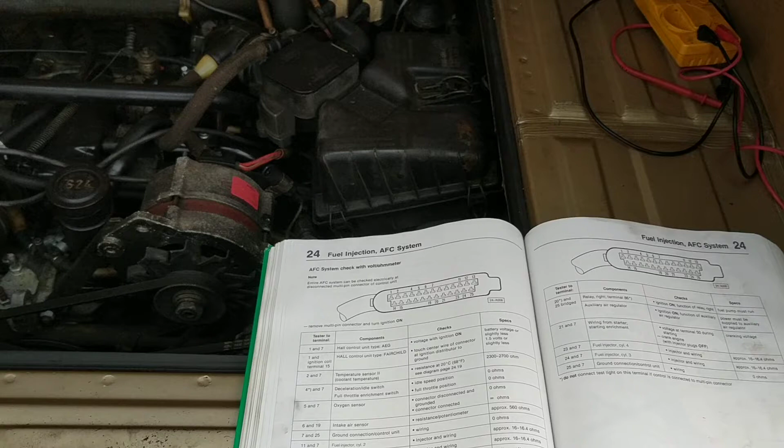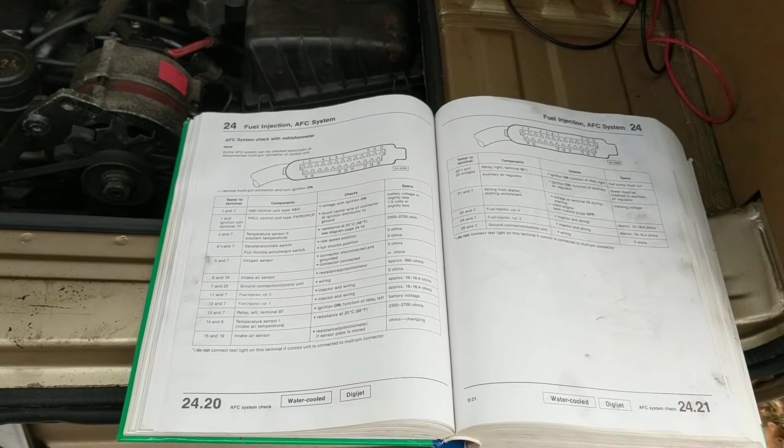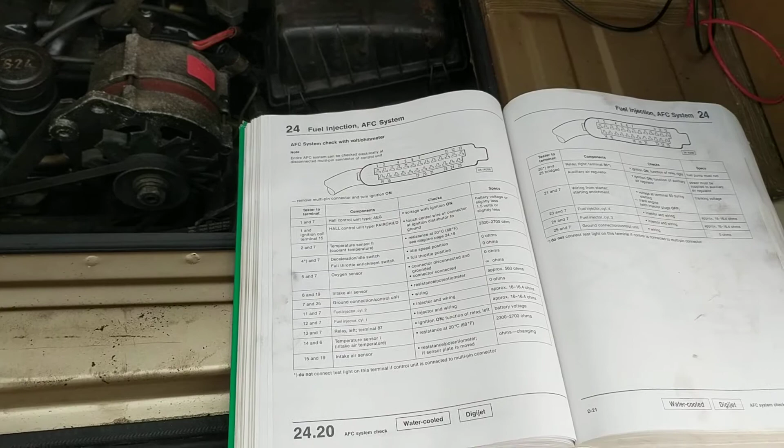People call me all the time with, Ken, my van won't start, my van won't run right, it runs good for a while, then it runs bad. And they think I have some kind of magical crystal ball that I can look into to tell them exactly what it is. Sometimes I can by the description, but a lot of times you could do a lot of the work for me if you would follow these simple steps. This is a way for you to figure out some of these problems on your own, feel good about yourself, and be able to move forward with your life.

Okay, so the first thing you need to buy when you buy your Vanagon, if this is not in the Vanagon, go on my website. There is one of these books on there. It's brand new, not beat up like this one. This one, a poltergeist threw it off the shelf for some reason. I came in the office and it was sitting on the floor, open to page 666, so that's how we know. But anyway, this is the Vanagon Bentley Repair Manual. It's worth its weight in gold, and quite literally.

All right, so once you get that, today we're going to talk about DigiJet. That's a 1.9 water boxer. You can see this beautiful display of it here. This is for the 1.9s, they use what they call the DigiJet system from '83.5 to '85. It's a pretty nice system, pretty easy to access and troubleshoot.

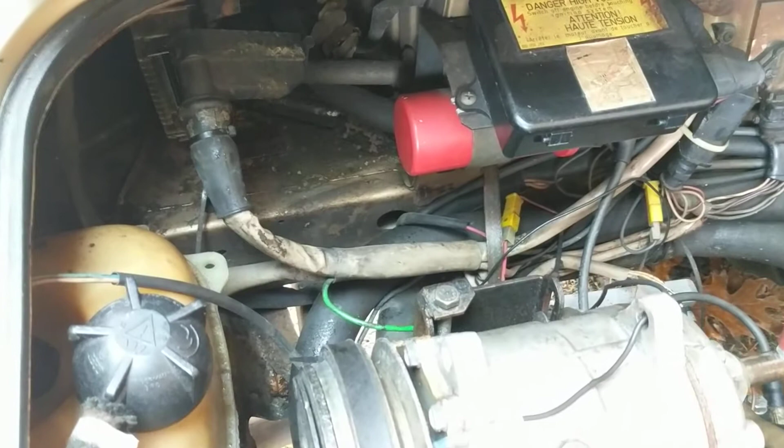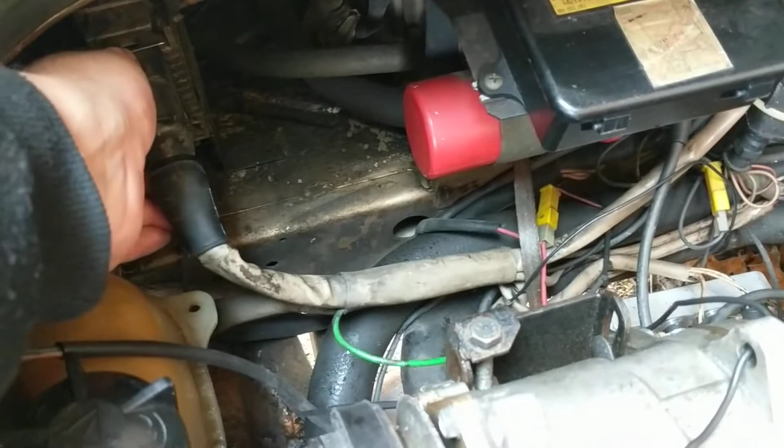The thing you're going to want to pay attention to, if this camera can ever focus, is this right here - this is your computer. It's behind the driver's side tail light, and it has this little plug that plugs into it. You just pop this little metal clip on the top, push up on it, and that'll release this plug right here. This is your plug for your ECU.

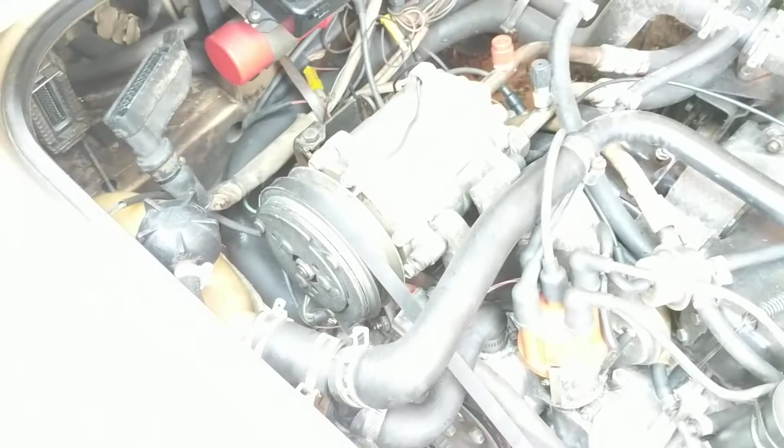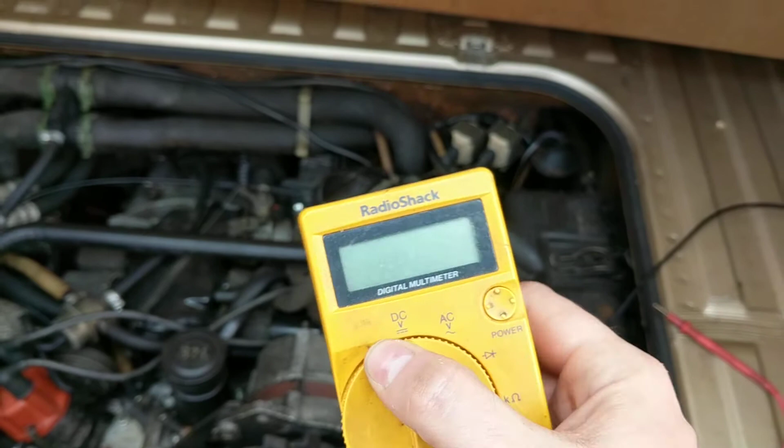It has 25 pins in there, and I know it can look scary, but then you want to use the second item that you should buy after you buy your van, which is a multimeter. This is a multimeter, or also called a multimeter if you don't have weird ways of pronouncing things.

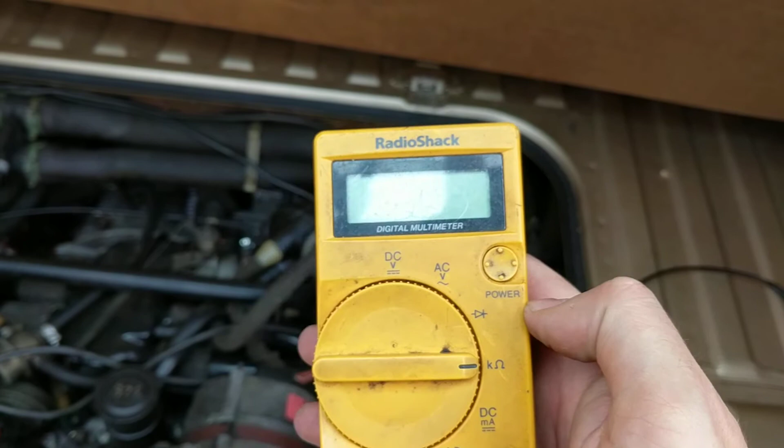Basically, you want to go to your local RadioShack - I mean, they're everywhere, I'm joking, they're over. All right, but go to a store, Harbor Freight has them. Get a multimeter that does ohms and does DC volts. That's all that you actually need.

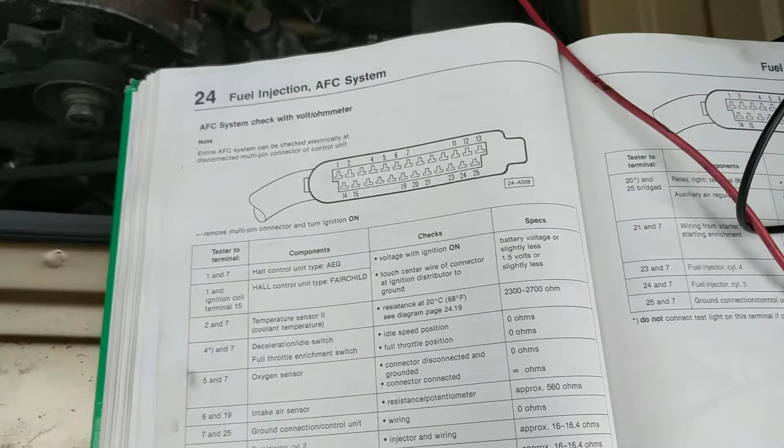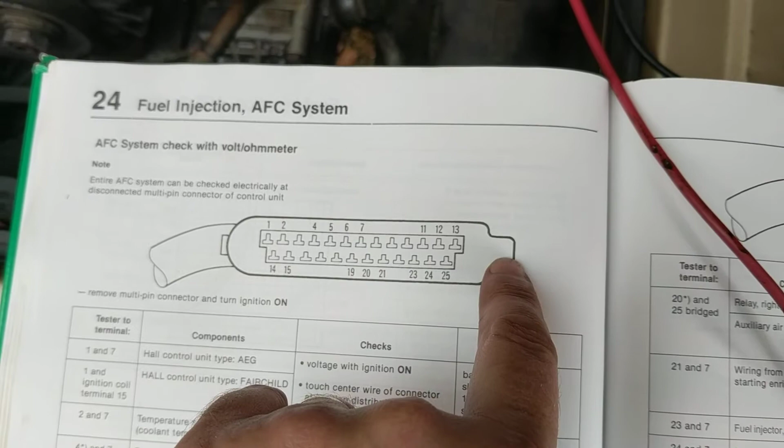Then what you do, you see this picture here, this is on page 2420. This picture at the top shows the plug. Do you see this little doodad here on this side? This is the wire harness. So if you're going to look at this plug the way the book is looking at it, you would look at it like that, because the harness thing is on the left side. If you could ever see it in focus, there we go - the harness thing's on this side, and this little tab is on this side. So that's how you would want to hold it when you're troubleshooting it.

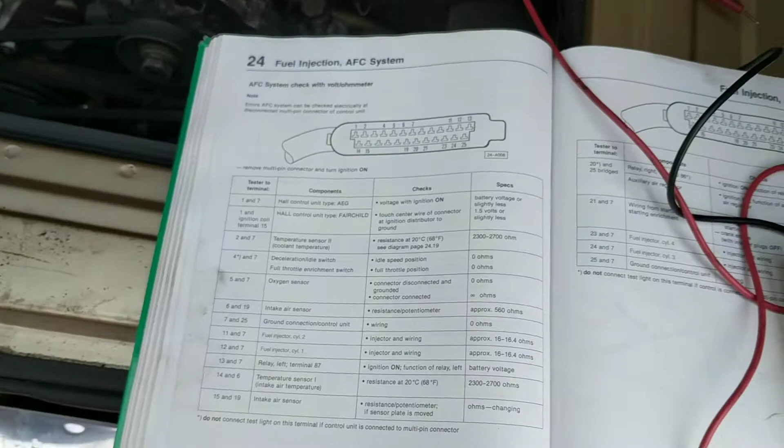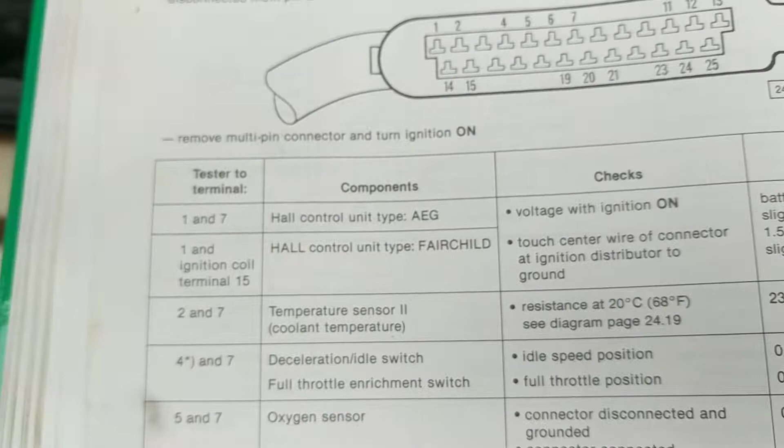Okay, that's how the pins are numbered. You won't see numbers on here, I don't think, unless you have super awesome eyesight, or a camera that stays in focus - sorry about the camera, guys. So once you know how to hold it and orient it, you will see on this picture the different numbers of the pins that actually matter. Why isn't every single one numbered? Because some of them are blanks and have nothing in them whatsoever. Then the next thing you want to do is come down here, and it will tell you a test - it has tests listed.

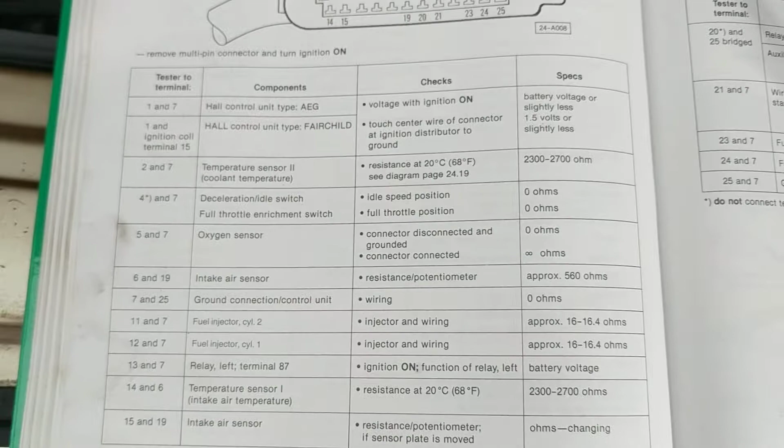If your van does not run or is having running problems and issues, I would encourage you to start at the top and go work your way down. Confirm what is going on with the car. This top one is the Hall unit.

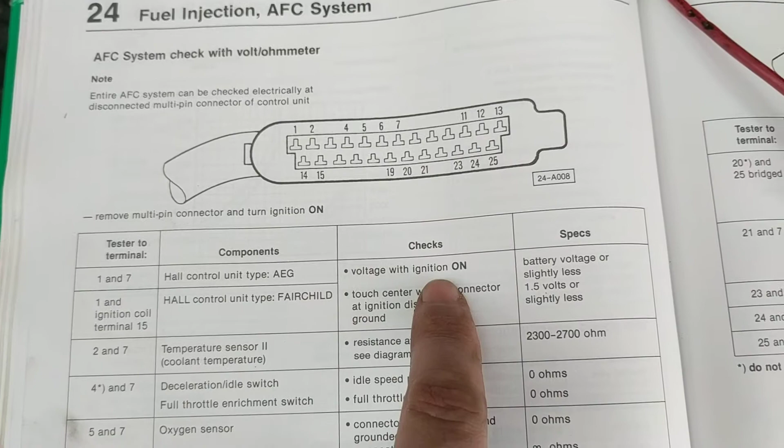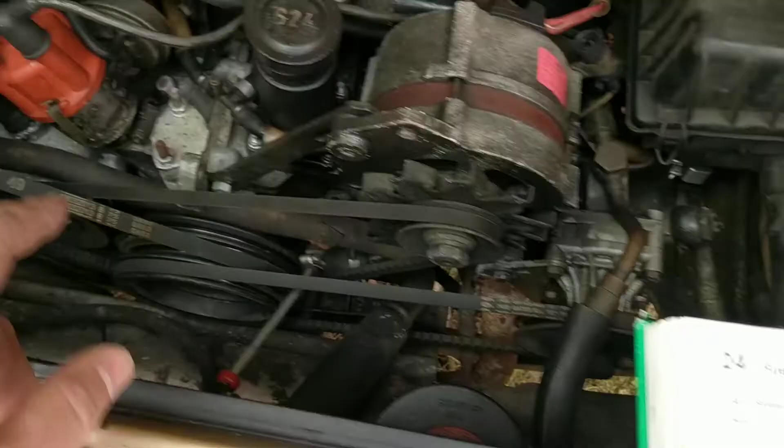Here is how you do the check. You turn the ignition on. You touch the center wire of the connector at the ignition distributor to the ground. That's what they're talking about, this thing right here.

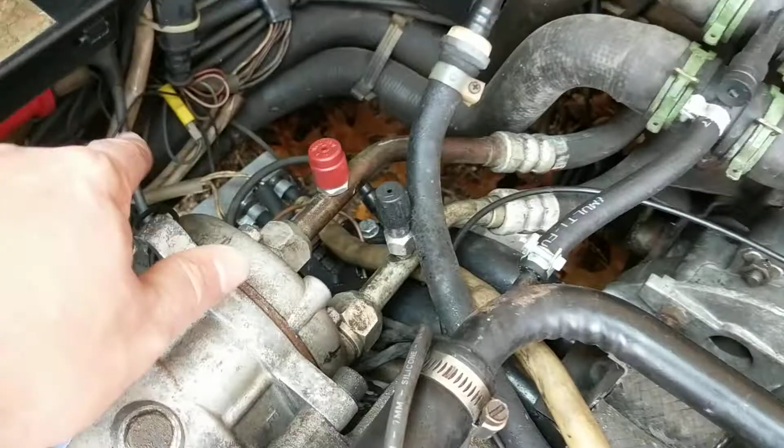Alright, I'm fixing it. There we go, this thing right here. You would ground that. You could unplug it from the coil over here and ground it to one of these little bolts or something.

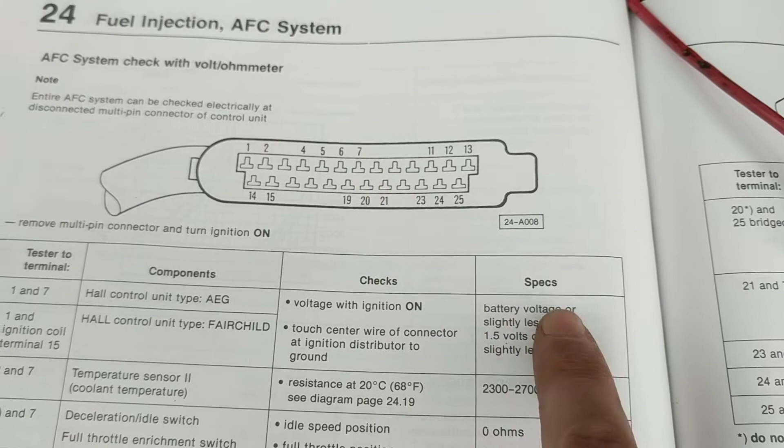While you are doing this test, it tells you what you're looking for: battery voltage or slightly less, okay? And you use pins 1 and 7.

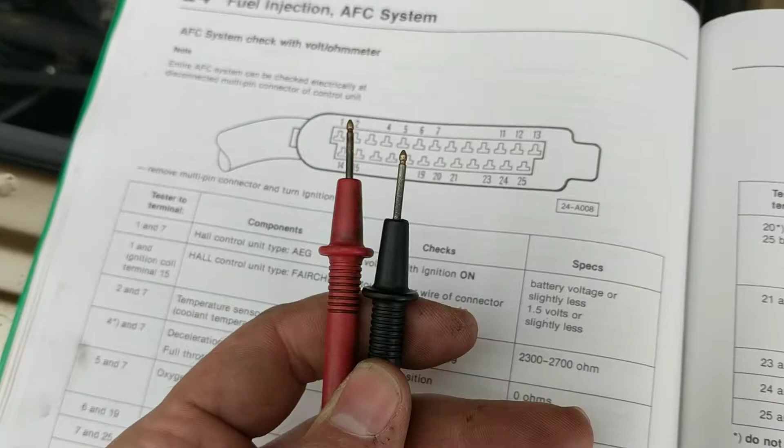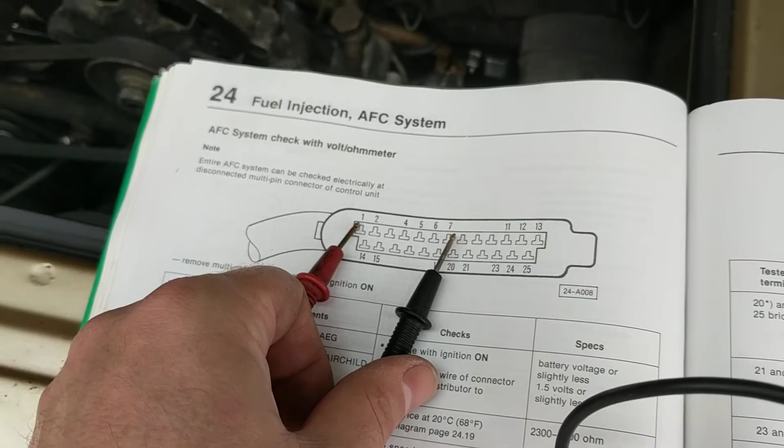So here's what's happening. You take these two leads, you put one on number 1, you put the other one on number 7, bam, bam. Then you look at your reading. You set this dial to volts, set it to DC, push the button so it lights up and gives you a reading.

Let's pretend I'm doing that, so there's no questions about whether I know how to stick pins into a plug. I understand the skill levels we're talking about here. So I'm going to try to do this with one hand. It's probably going to be terrible.

But basically, you can see these little pins in here. I normally don't stick them in between where the pins of the computer go, because I don't want to bend that. So instead I'll do it above or below. See where it has this little indentation thing on each pin? I would just stick it in that part.

So I had that in number 1. Then you just count over, 2, 3, 4, 5, 6, 7. Stick the other one in there. And bam, you're ready to do your test.

Your eyes will focus and stay focused, unlike this camera. That's how you would do that. Put the two leads in there like that. They'll actually stay, and you have your thing where you can read it.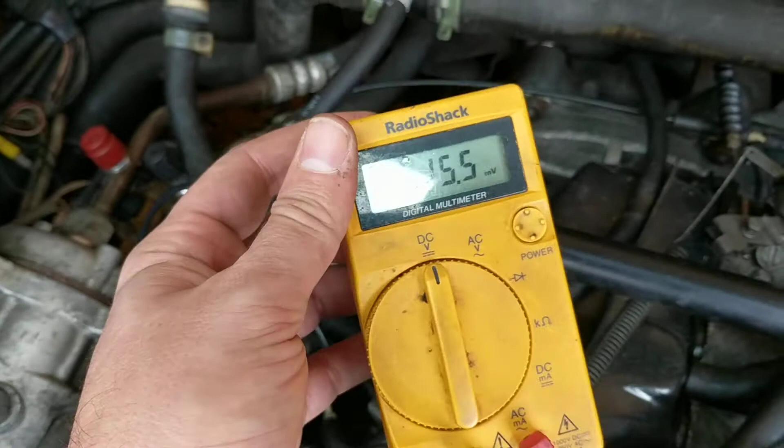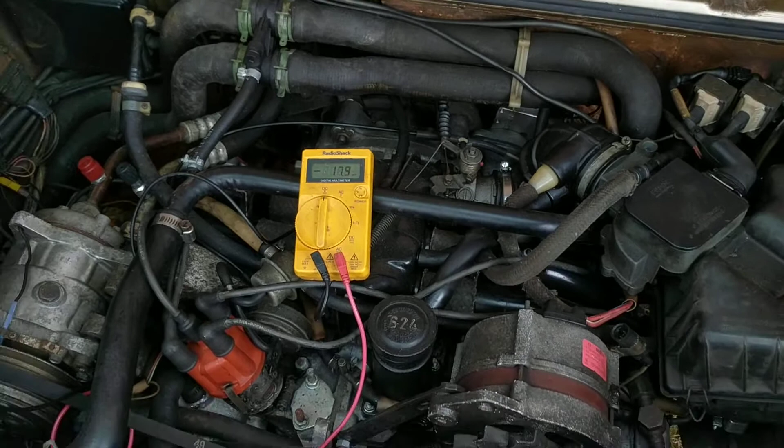I don't have the ignition on to do this test. This van is actually running perfectly great, so there's no real reason for me to test it. I'm just kind of giving you an example. So that's one test you would do.

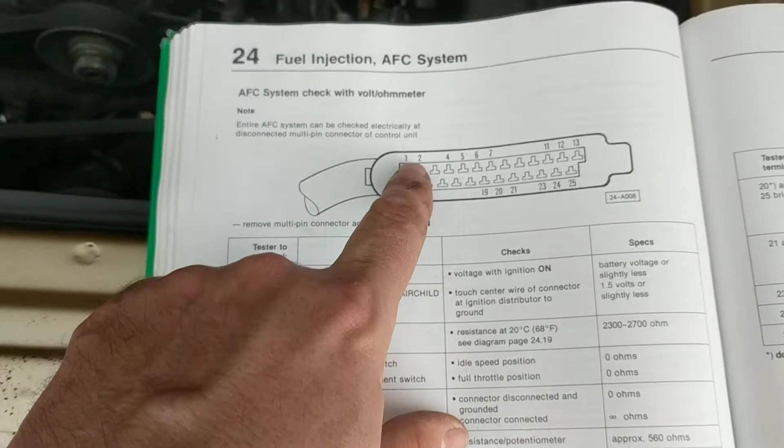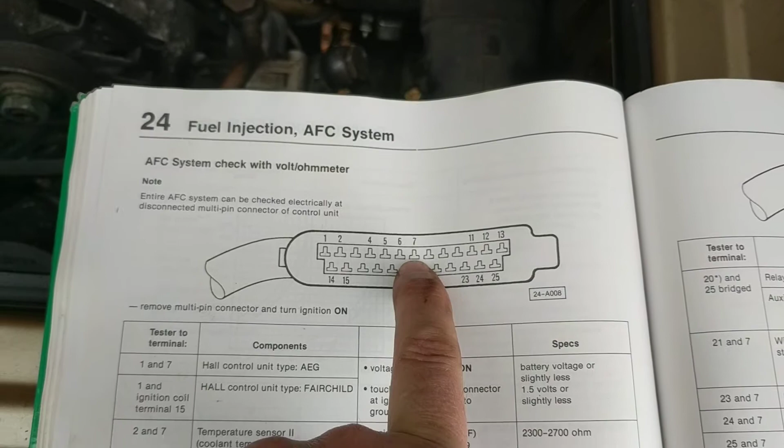There's another test you would do here for your temp sensor. Again, you would do the exact same thing, except put one pin in 2 and one in 7. You know, 7 is a ground, spoiler alert, it's a ground, so it gets used a lot. So you could leave one pin in 7, the other one put in 2.

For the temp 2, let me do that one. That's a common one. Let me move this over. You can't see it because it's out of focus again, shocker of a lifetime. Can I do it by looking at it? Without looking at it, bam. Yep.

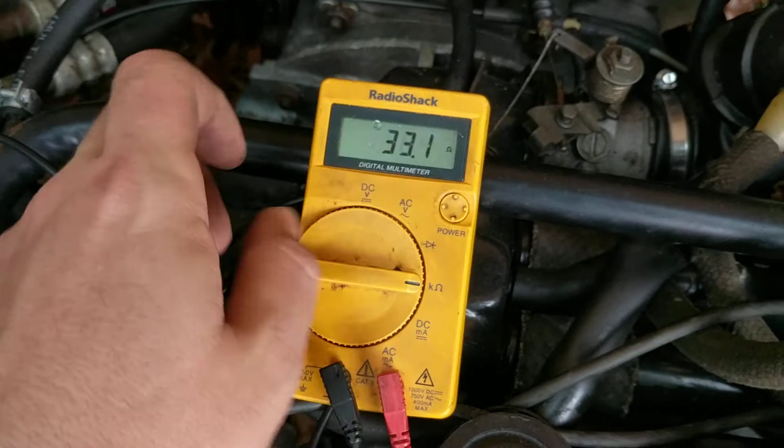Let me stick that in there. This one's still in 7. Good. Now this one is an ohms test, so you have to turn this dial to the thing that looks like Omega. And you'll see, it comes up on here: 2.553 K ohms.

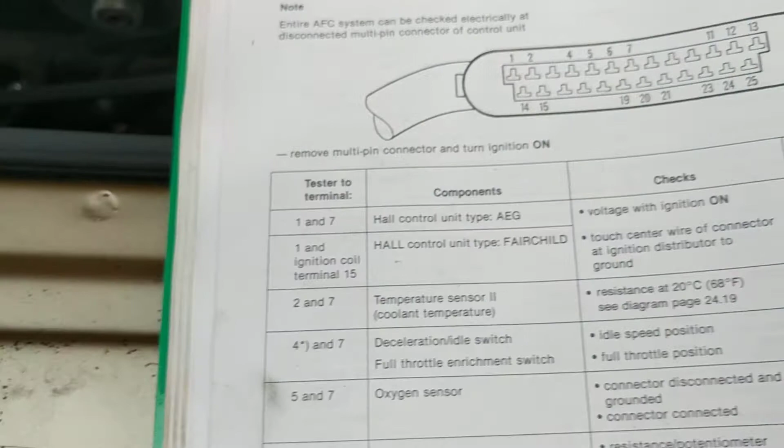So what is the specification here? It says resistance at 20 degrees C, which is 68 degrees, about what it is today, should be between 2300 and 2700 ohms. This is saying K ohms, even though it shows 2.553. You basically ignore the dot, so it's 2553. Guess what, that is in specification, between 2300 and 2700. Perfect.

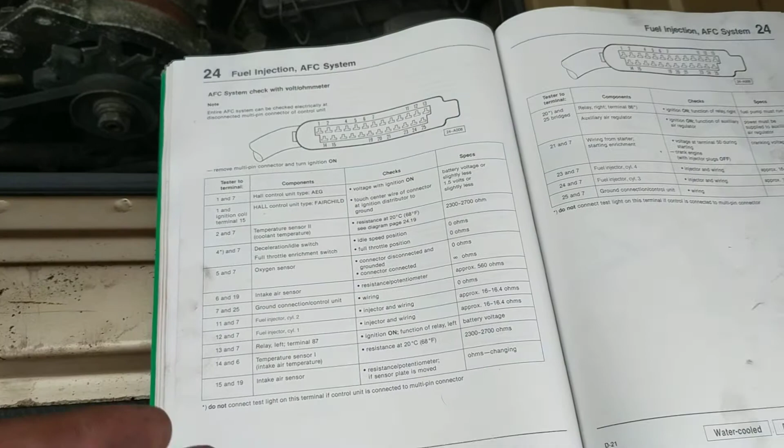Like I said, this car was actually running good, so I'm not surprised that has a good reading. The good part about doing this and using the computer plug is you have this list of tests, there's only maybe 15 of them, and you can go through this in about 15 to 20 minutes and be done.

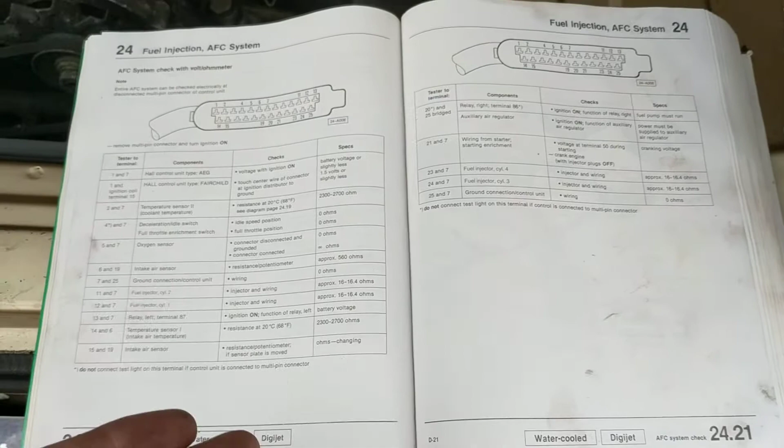And you will have eliminated a lot of things that could be a cause of the problem. You may have found the problem in just a few minutes. It's very simple and easy, as you see. I'm not doing anything magical, not saying magical spells or throwing holy water on this thing, okay?

The other good part about doing this at the computer plug is that not only are you testing the sensors, you're also testing the wires as well.

And if there's a problem, say you get a bad reading from this temp sensor, the next step would be to go to the temp sensor itself, which is down here by the water pump area. It's hard to see with a camera. Unplug it and see what it's reading. If it's reading good at the sensor, then something's wrong with the wiring between the sensor and the computer.

So there's a bad wire in there somewhere, maybe the ground is bad, something like that. That is just an easy way to test this and go in an organized fashion to figure out what is going on between the computer and the fuel injection harness and that kind of thing. One other thing I want to mention: a lot of problems in vans are caused by ground issues.

As some of you guys know, there's supposed to be this grounding strap right here. See where the coil is? It comes out under the coil. There's a bunch of grounds here. It goes over underneath of this AC compressor and hooks to the cylinder head, kind of right in this area. Again, it's hard to see, but you can feel it with your hand, that kind of thing.

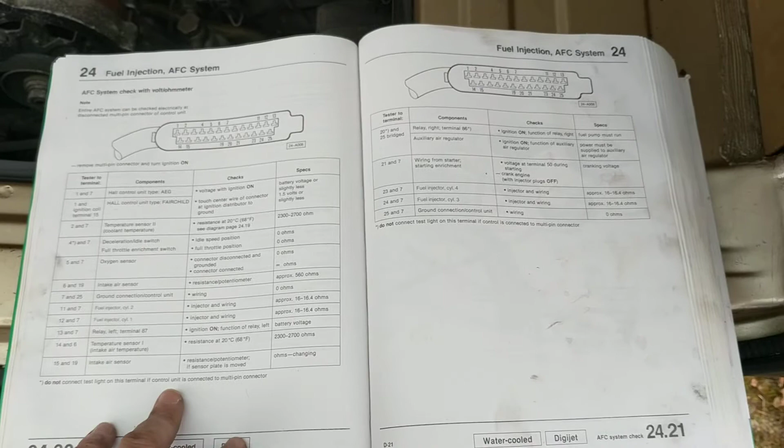But I'll just tell you the truth. Most of the time when I use the book and go through it in an organized fashion, and just do all the tests, eventually I usually find the problem right here. 15 minutes later, I can get a new sensor or replace a wire or something, and the van is back on the road.

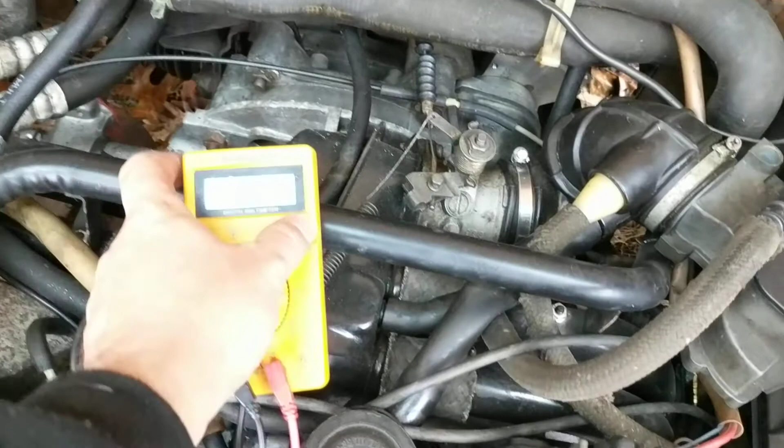Now this is for the DigiJet, for the 1.9. You know, the 2.1 is similar, but this computer is not located here. It's actually located underneath of the back bench seat over there. So if you have an 86 to 91, don't be freaking out if you can't find your computer over here behind the taillight, because it doesn't live there. It lives under the back seat instead. But it's very similar, there's a different page in the Bentley for that one. I may do that in the future so you can see it and not get confused.